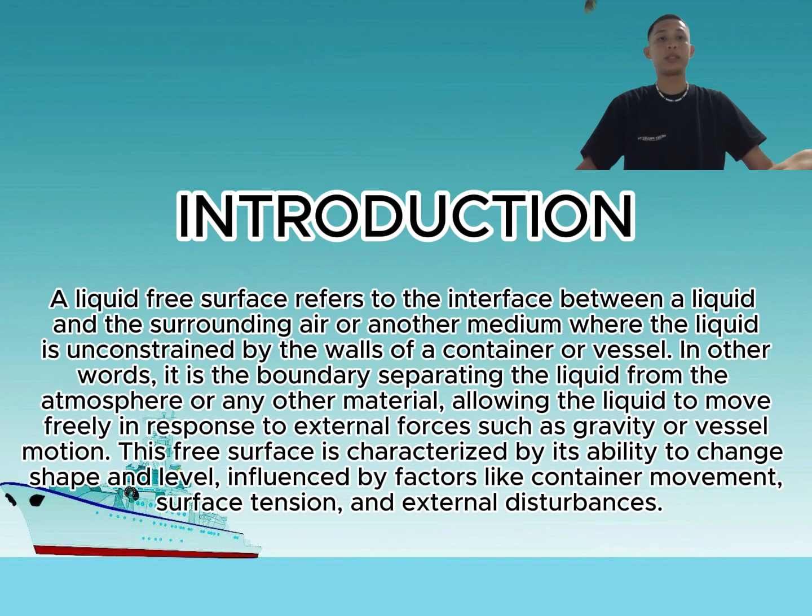This free surface is characterized by its ability to change shape and level, influenced by factors like container movement, surface tension, and external disturbance. So in discussion, when a ship has partially filled tanks or compartments, the motion of the liquid within those spaces can significantly affect the ship's stability.

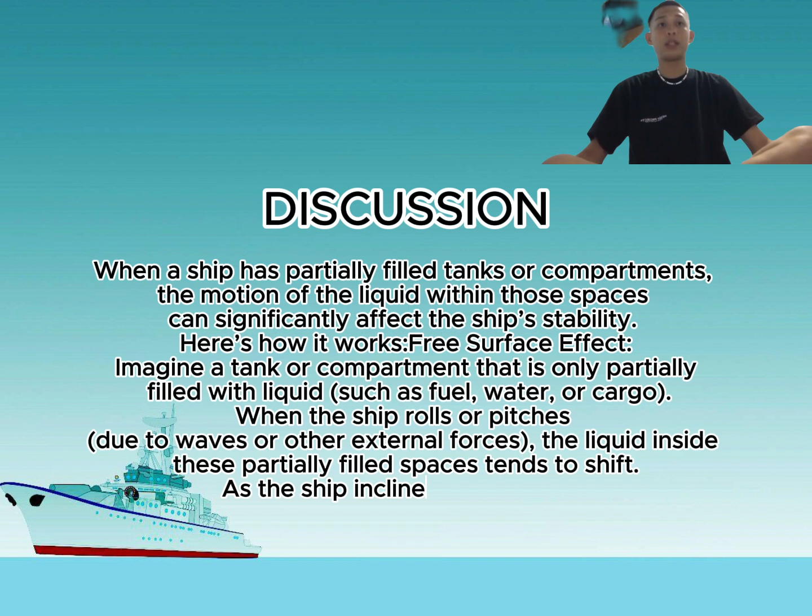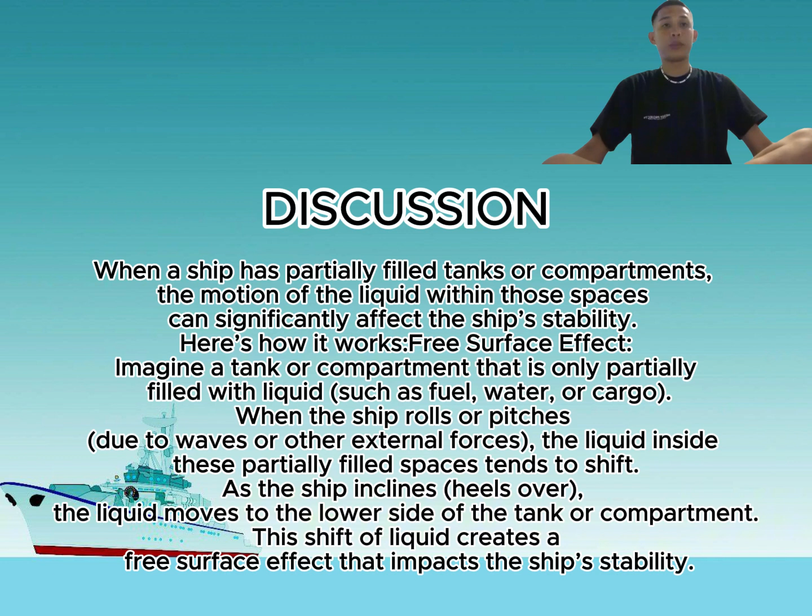Here's how it works. First is the free surface effect. Imagine a tank or compartment that is only partially filled with a liquid such as fuel, water, or cargo. When the ship rolls or pitches due to the waves or external forces, the liquid inside this partially filled space tends to shift. As the ship inclines, heels over, the liquid moves to the lower side of the tank or compartment. The shift of liquid creates a free surface effect that impacts the ship's stability.

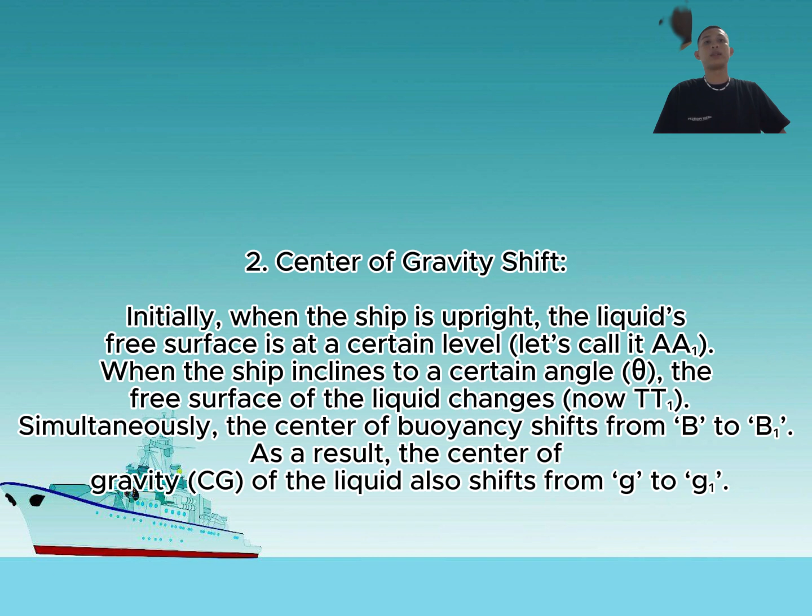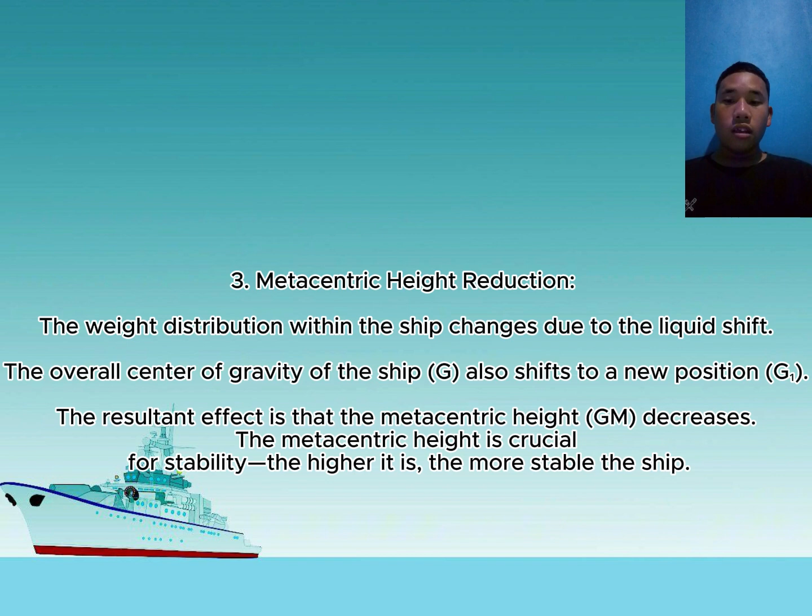Number 3. Metacentric height reductions. The weight distribution within the ship changes due to the liquid shift. The overall center of gravity of the ship also shifts to a new position. The resultant effect is that the metacentric height decreases. The metacentric height is crucial for stability. The higher it is, the more stable the ship.

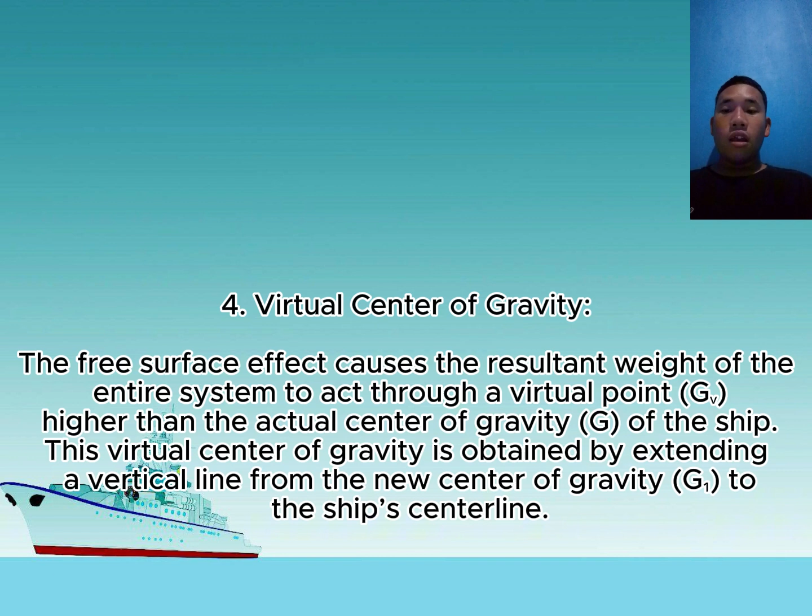Number 4. Virtual center of gravity. The free surface effect causes the resultant weight of the entire system to act through a virtual point higher than the actual center of gravity of the ship. This virtual center of gravity is obtained by extending a vertical line from the new center of gravity to the ship's center line.

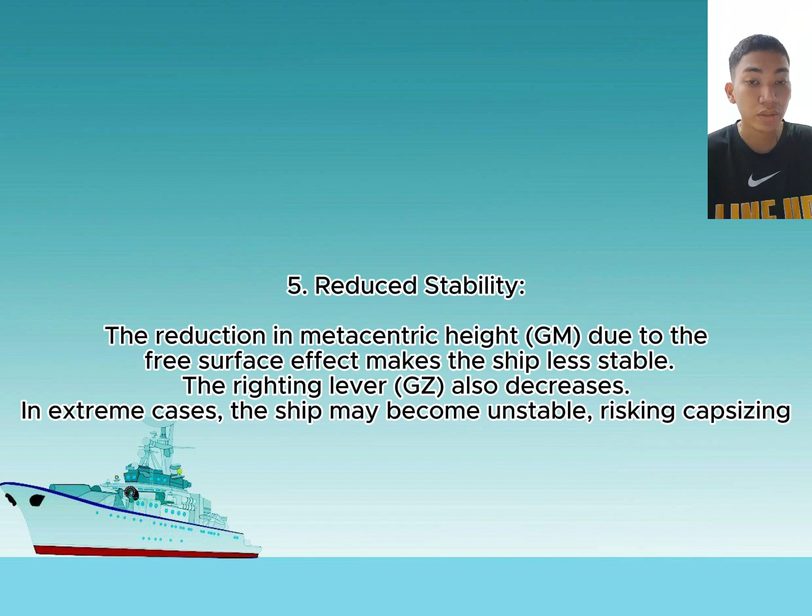Reduced stability. The reduction in metacentric height GM due to the free surface effect makes the ship less stable. The righting lever GZ also decreases. In extreme cases, the ship may become unstable, risking capsizing.

Mitigation measures. To avoid the free surface effects, design tanks and compartments to be fully filled whenever possible. Minimize the use of partially filled tanks. Use baffles or anti-sloshing devices to reduce liquid movement.

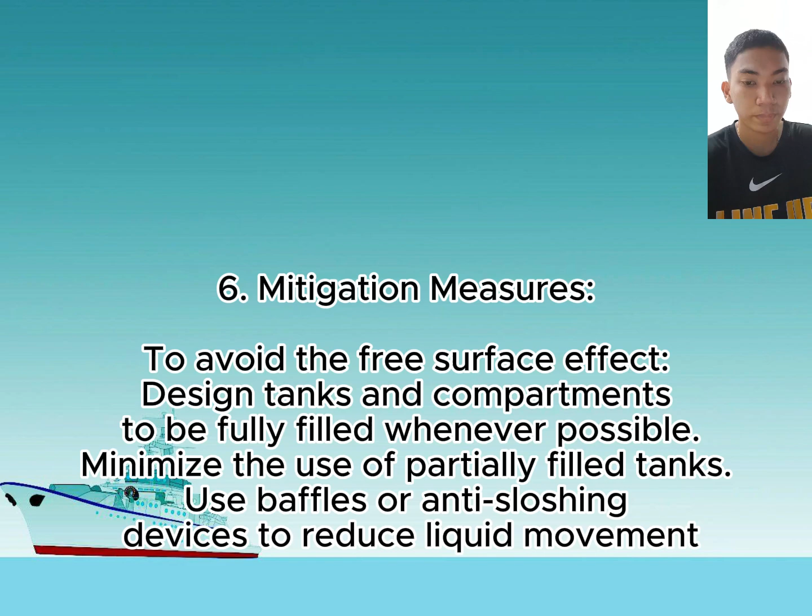The liquid free surface within tanks or compartments presents a formidable challenge to vessel stability, demanding careful consideration in maritime operations. Its presence alters critical parameters such as the metacentric height, diminishing the vessel's ability to resist tilting forces and increasing the risk of capsizing. The dynamic forces generated by the free surface effect further exacerbate stability concerns, hindering corrective maneuvers and potentially amplifying rolling motions.

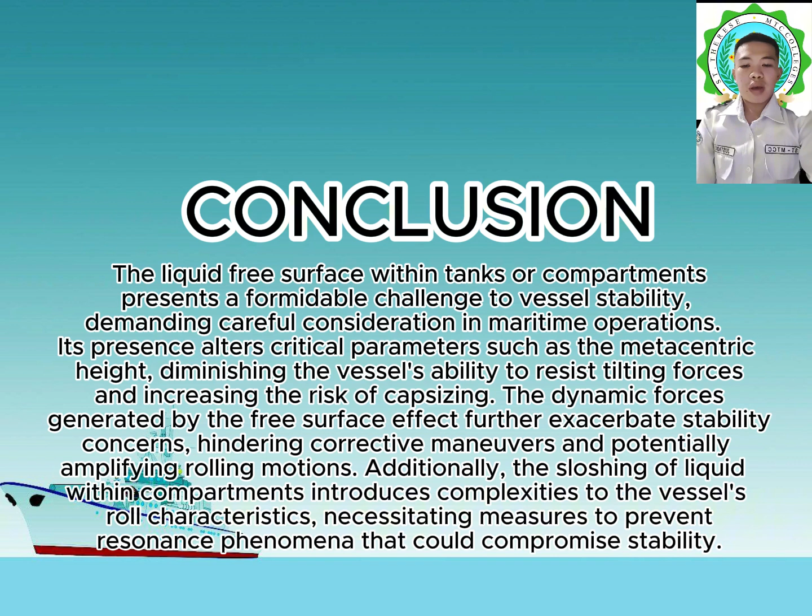Additionally, the sloshing of liquid within compartments introduces complexities to the vessel's roll characteristics, necessitating measures to prevent resonance phenomena that could compromise stability. Effective management of liquid distribution, coupled with adherence to robust stability criteria, is essential to mitigate these risks and uphold safety standards in maritime transportation. Overall, understanding and addressing the impact of liquid free surface on vessel stability is paramount to ensuring the safe and efficient operation of vessels in diverse environmental conditions.